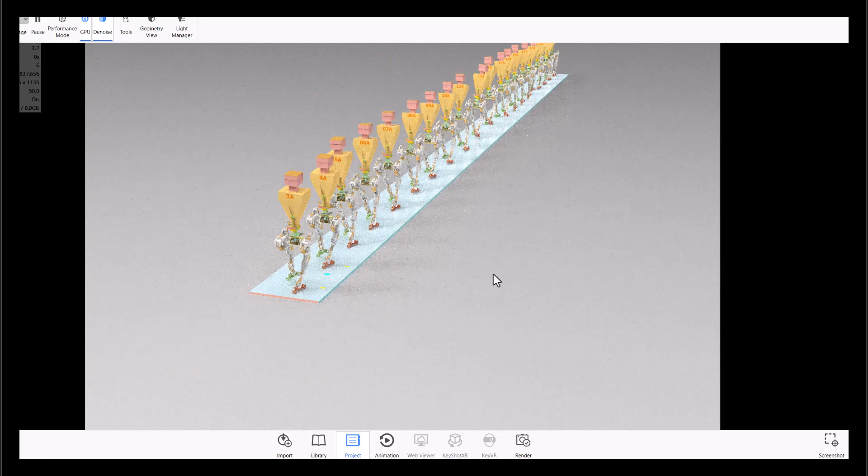We are continuing our discussion of the piston robot, but it's a little bit more on the topic of a human mimicking robot that's powered by hydraulics. And my question is, well, what is wrong with that? That's really what we're addressing here.

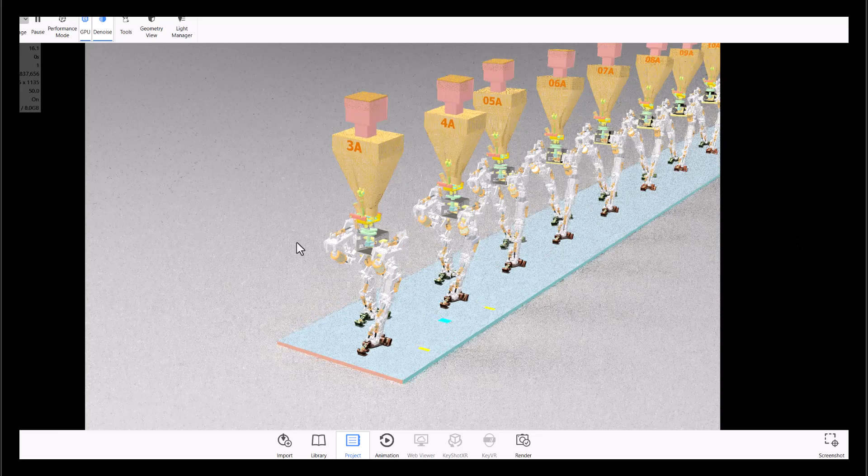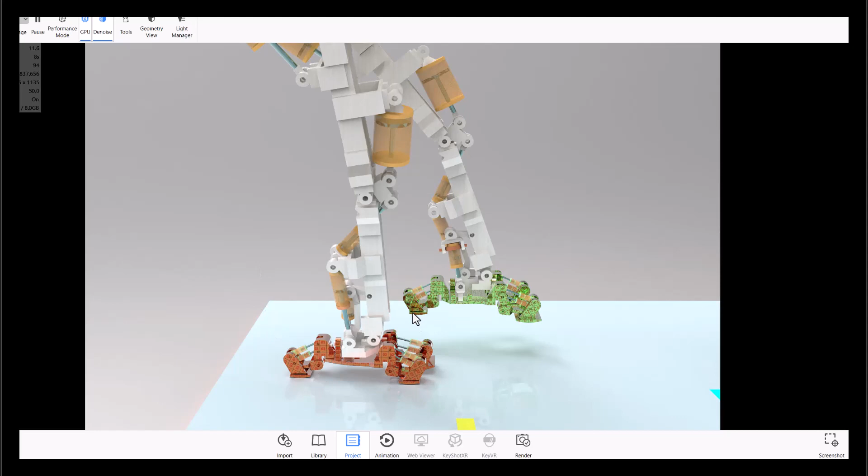These metal structures, there's enough strength in these hydraulic cylinders to lift up a 200-pound robot. Just one of them, right down in through here, there's enough strength. This would be the calf muscle, but there's enough strength in here to push your toe down, push the robot toe down and lift the heel up, and it's on about a 2 or 3 to 1 leverage for a 200-pound robot. That's 600 pounds of force.

If you had your finger in there or your hand in through here, it would cut it right off, just like a pair of scissors.

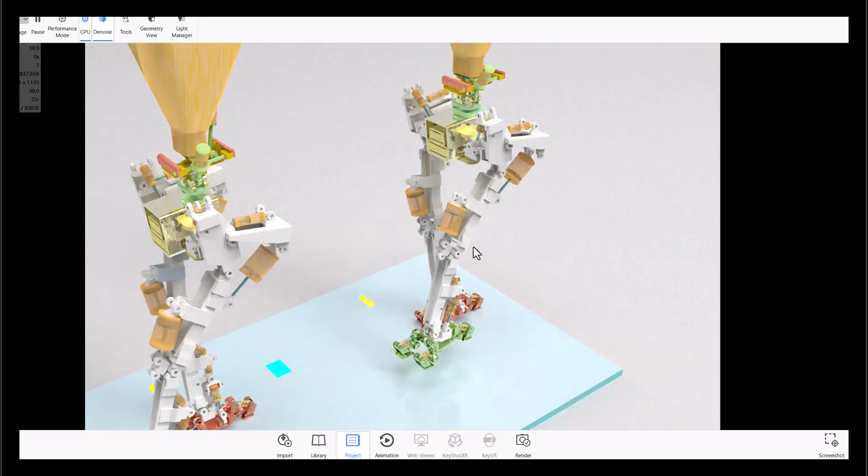And if you were over here on the other side of the robot and managed to get it programmed wrong, and the robot, remember these legs, the robots that I designed, they have the exact range of motion a human being has. So if this robot flexed this leg all the way up, it easily could kick you in the face and hurt you.

So I don't mind talking about it. It's interesting as an intellectual exercise, but be careful. This robot could really hurt you. I would not have anybody create this robot unless they're very well versed in robotics.

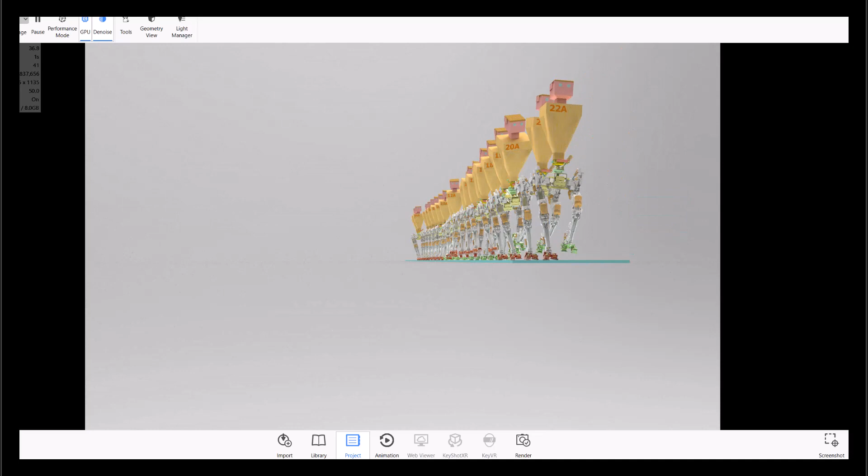And we can say, another issue, I was working on talking about the robot for it to be doing a deep knee bend, and I was working through how much force is needed to get to this deep knee bend.

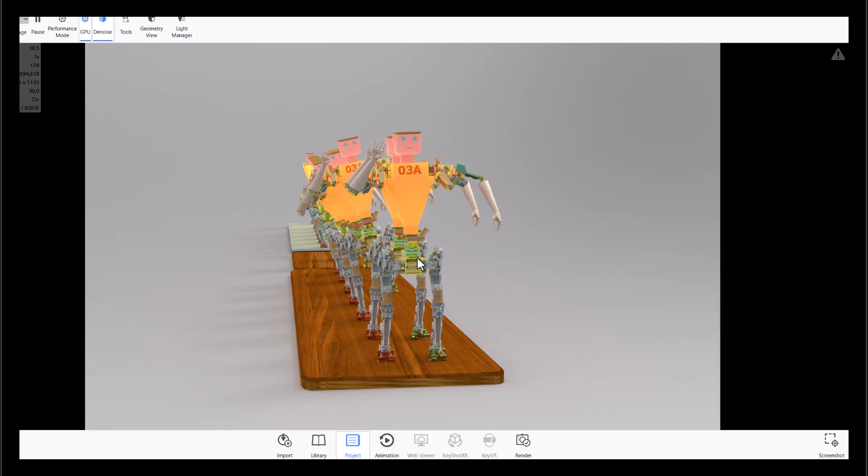And I can say, if my wife was here, I can tell you, if you have any way that you can keep serious illness away from yourself and your family, you should do that. Serious illness is no fun.

Anyway, if my wife was here, I'm pretty sure she would say, wow, that is an ugly robot. And my reply to that is I didn't really design the robot to be pretty.

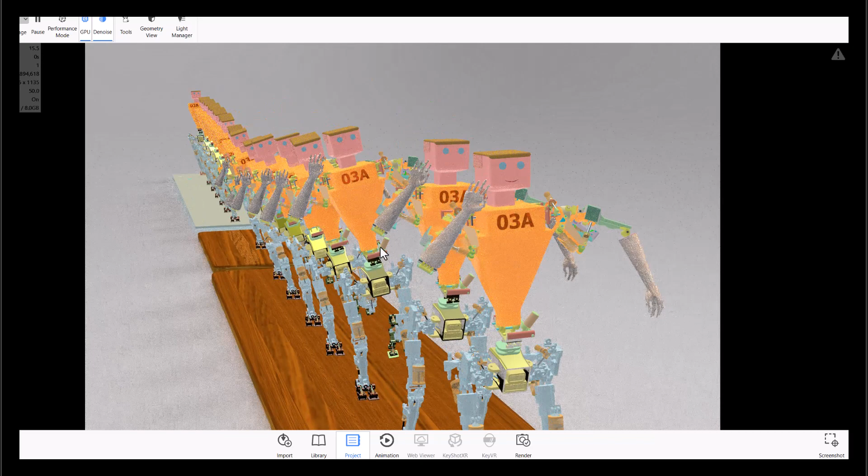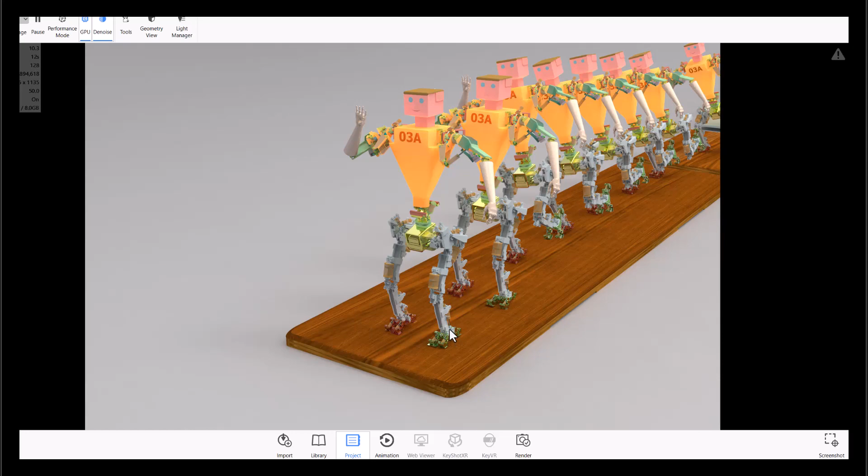I designed the robot to answer the question: can you make a robot out of physically real parts that is a duplicate of a human being? Can it have all of the ranges of motion of all of the axes of the joints? Can it have, this is a 3-axis joint, this is a 1-axis joint, this is a 2-axis joint. Can it have what human beings have? But I thought maybe the reason nobody has made an actual human mimicking robot where it is a duplicate of the human is that it wasn't possible.

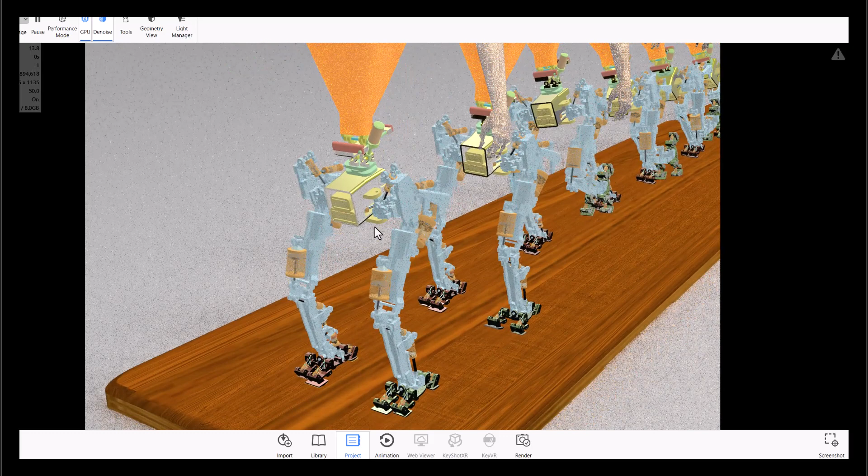And I thought that I would create it using a high quality 3D drawing program, so I could establish and show myself, or show anyone who cared, none of these parts are running into each other. You don't have something where two different physical structures are in the same place at the same time. And that is done best, I think, with a 3D drawing program.

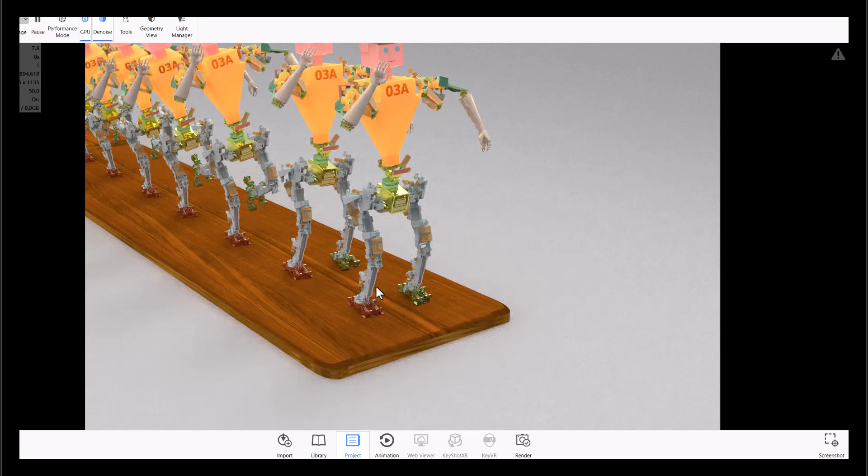So that everyone that's like, yeah, oh great, well sure, you got all this capability, but your robot is impossible — my answer is, it's not impossible. This could be created. I'm happy to create an FBX export of this.

She also, my wife, said, listen, you can't have a robot that doesn't have a head with a face and eyes. And this head is not doing much other than, I thought, okay, I can put a head on it. But it probably would have something to do in a real robot. That's a great place to put the processing system.

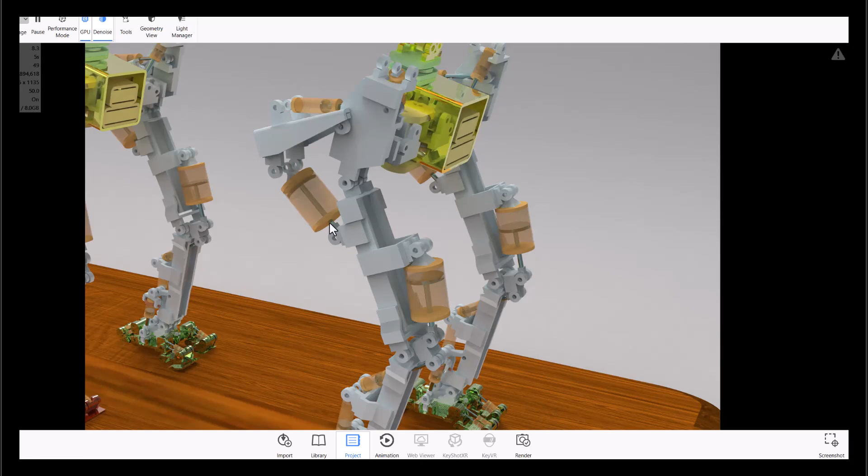Now, the robot that I created, this material is aircraft aluminum alloy. This is probably 2205 alloy stainless steel.

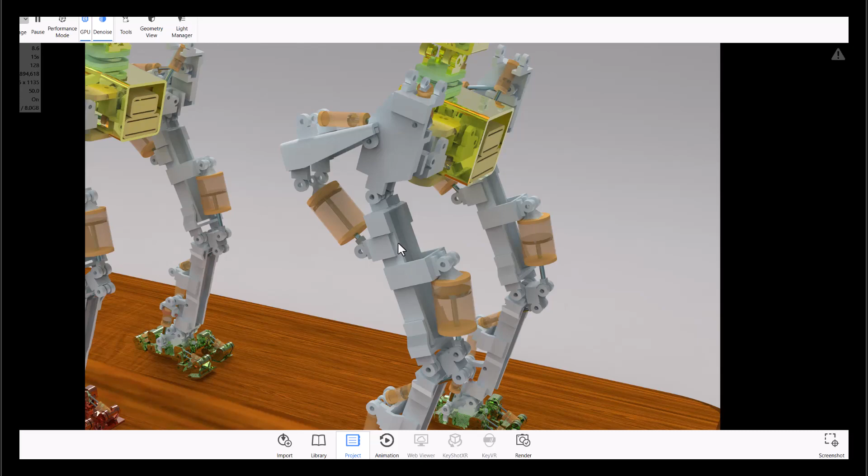The hydraulic fluid of this robot does not need to be oil. There's no need for that. Materials exist that can work with water, and so are the pumps. I would have this robot made where the hydraulic fluid was water, so that if the robot needed to be taken apart and something fixed or drained, or you changed how it was, all that happens is you might get some water on the floor. And if you need to refill the system to get it working again, you go over to the sink and get more water. I absolutely would not use hydraulic oil, and it's not needed.

There's fire — the pumps used to pump fire retardant chemicals are created not to have to pump oil, particularly at the pressures that we're talking about.

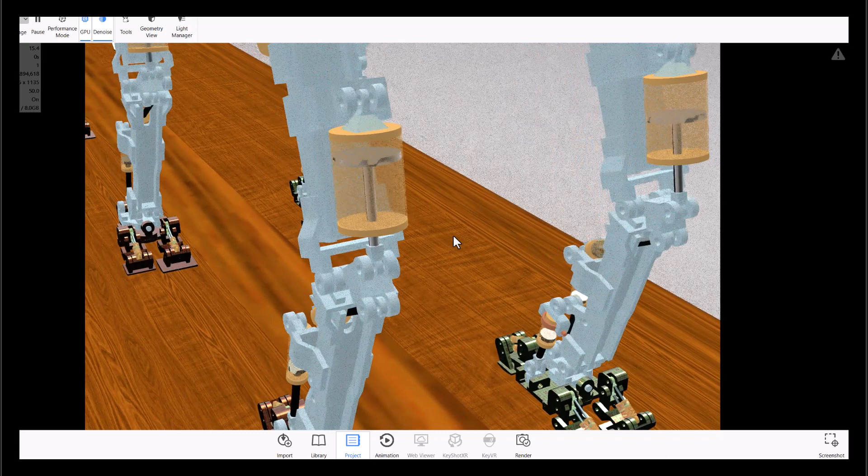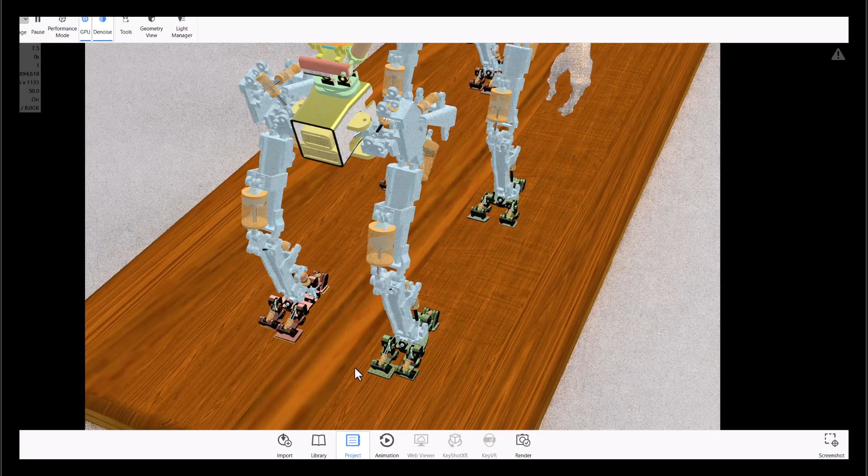The other thing I would say is, particularly if this is 2205 alloy stainless steel, and some of this is, and the rest of it is aircraft alloy aluminum, in my opinion, if you and three of your friends, we gave you this shaft right here, I don't think you could do anything to it. You might be able to scratch it if you had a rock.

The reason I'm mentioning that is, if this robot falls over, as we say we're working on the deep knee bend and just get it wrong, it's all design. Every piece of the design that is weak or small or cannot take force, I didn't use that. So if this robot falls over, nothing's going to happen other than my wife would go, why is the robot lying on the floor? And the reply is, well, I didn't program it right.

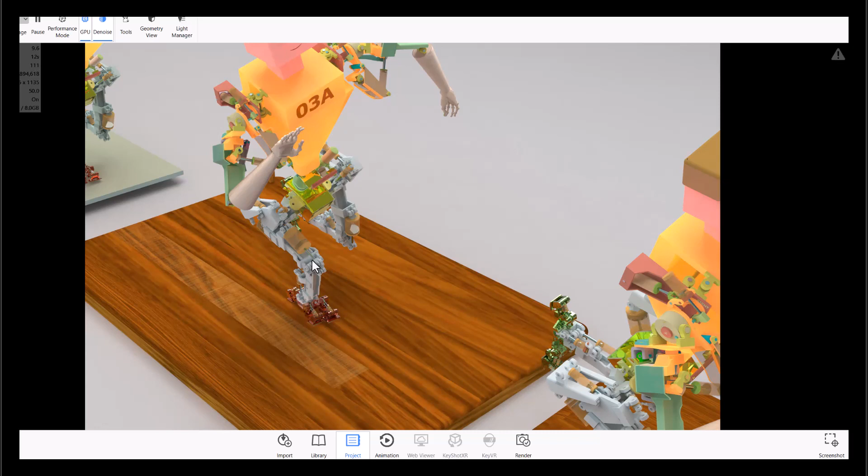But it's not going to be hurt. Another issue with this design, particularly with the force, power and speed you get with hydraulic cylinders, if the robot is lying on the ground on its back, and someone says, so now what? The answer is, well, if you were lying on the ground on your back, how would you get up? And they would tell you, and then you would say, all right. And this robot can do that, because it has the range of motion of all of its joints that a human being has.

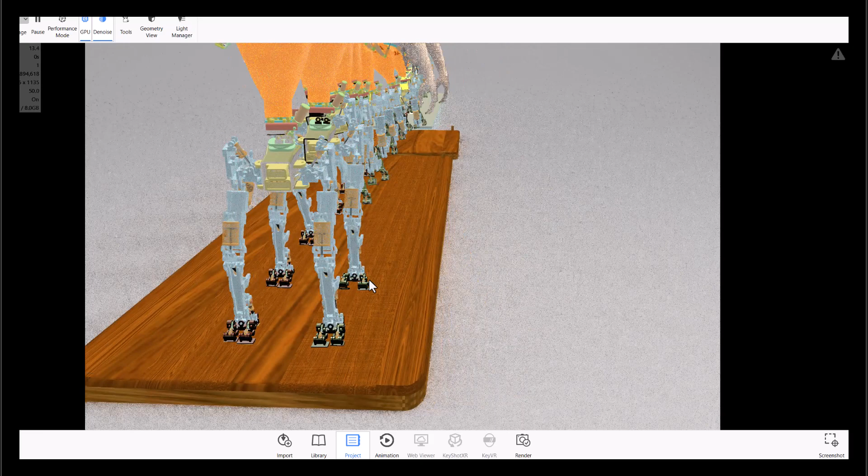So whatever a human being did to get back up again, this robot can do it. I think that's exceptionally useful and something that's available with hydraulic cylinder robots, because they have the strength, the speed of motion, and the leverages and power, and they give you the range of motion that you need, so that whatever a human being does to get up off the floor, the robot can do.

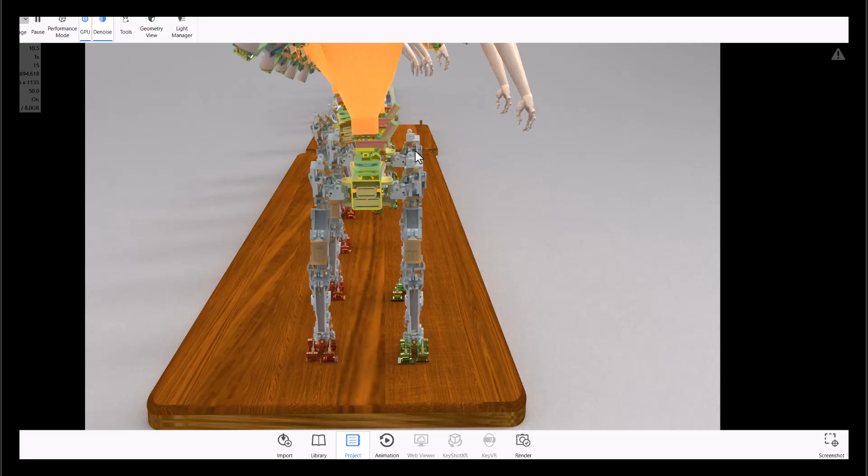And I know my wife would be saying, why is everything so big? I mean, that's a set of hips to be proud of. The reason is, if you put in the abduction, adduction, flexion, extension, internal, external rotation of the human hip that human beings have, it needs to be this wide for this model. I mean, there might be somebody that can do this a different way.

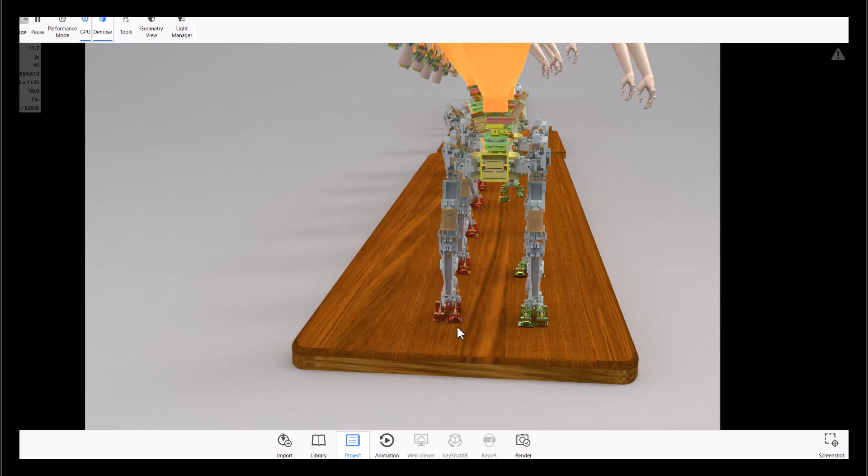The final thing I would mention is, you can see here with the robot standing on the ground, there's the little toe on the right, the big toe on the right, the big toe on the left, the little toe on the left, the heel on the left, and the heel on the right. As long as the center of gravity of the robot is inside of this polygon, the robot is balanced.

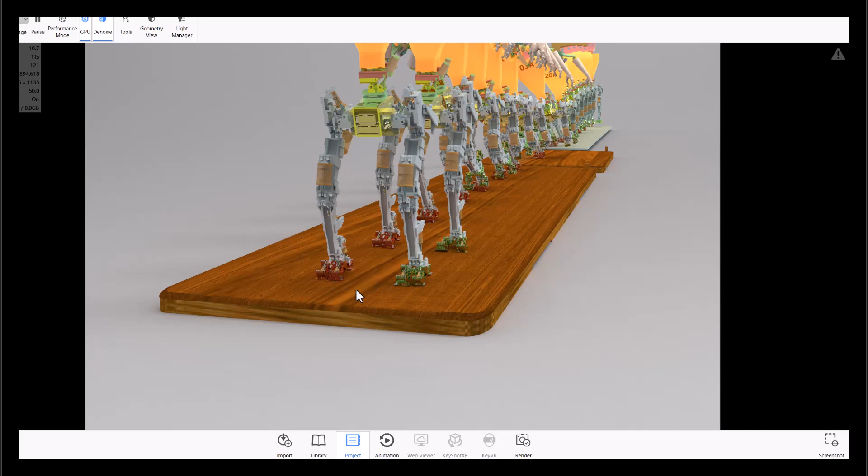If the center of gravity of the robot is outside of this polygon, the robot is going to start falling over. And the further the center of gravity is, the faster it's going to fall. That becomes important, I think, from a management of the robot viewpoint.

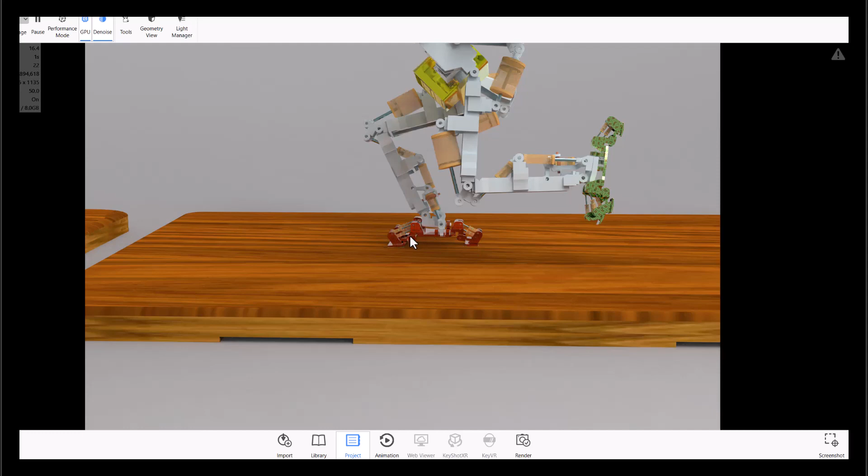You'll notice when the robot is standing on its foot, you have the little toe, the big toe, and the heel. So the center of gravity of the robot has to be over that triangular shaped polygon. And I think the robot, if you look at the weight distribution, it's about right for doing that.

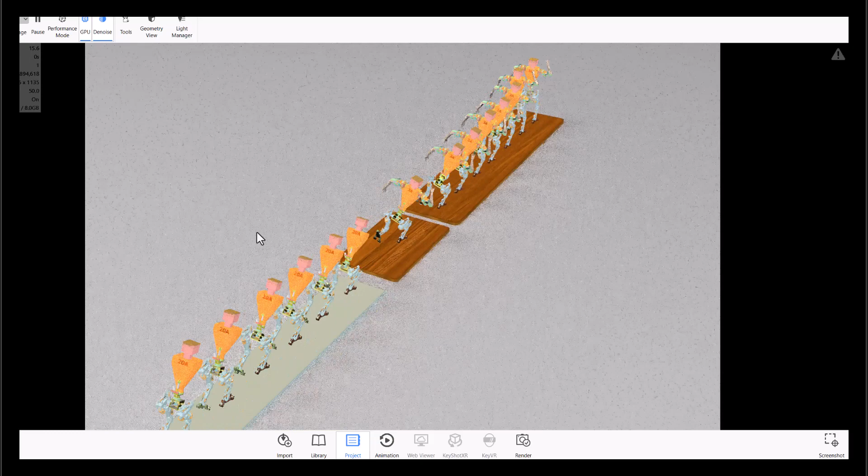And you'll notice, see how it's tilted off to the right? That is because the weight of the robot has to be over the foot. That's different from where the weight of the robot can be if it's standing on both feet. Notice its head is moving over because when it gets back to both feet, it's standing up straight.

And the final thing we can mention, I would just look at this knee and leg, this articulation. The contraction speed of human muscle is 15 centimeters per second. So it has to move at 15 centimeters per second, and it has to do that in 150 milliseconds. The hydraulics people will tell you...

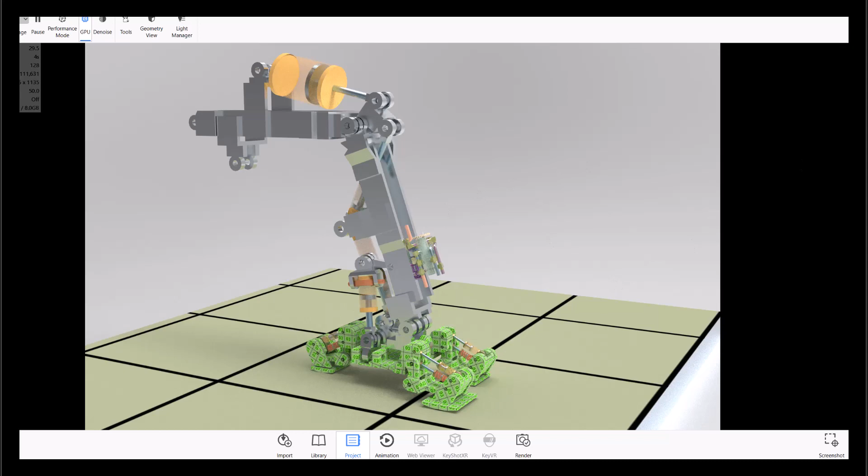...that the rate of flow of fluid should not be faster than 15 feet per second. So if you know the volume of this cylinder, and you know how much fluid you need, and you know the rate of motion of this cylinder, it can tell you how big the valve has to be in order to keep the flow rate correct.

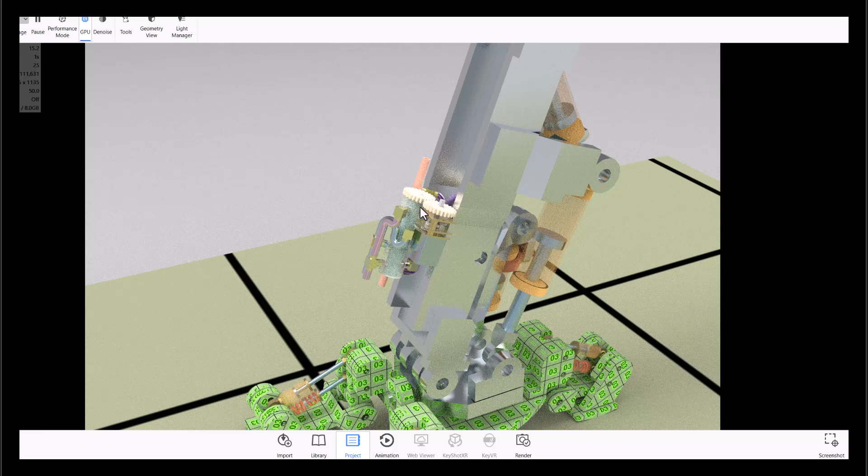But what I'm showing with this valve is these are 1/8 inch diameter tubing. They are more than adequate to give you that rate of motion for these cylinders. You might need a bigger valve up here for this one, but the point I'm making is you can give the robot 15 centimeters per second. It's not impossible with hydraulics.

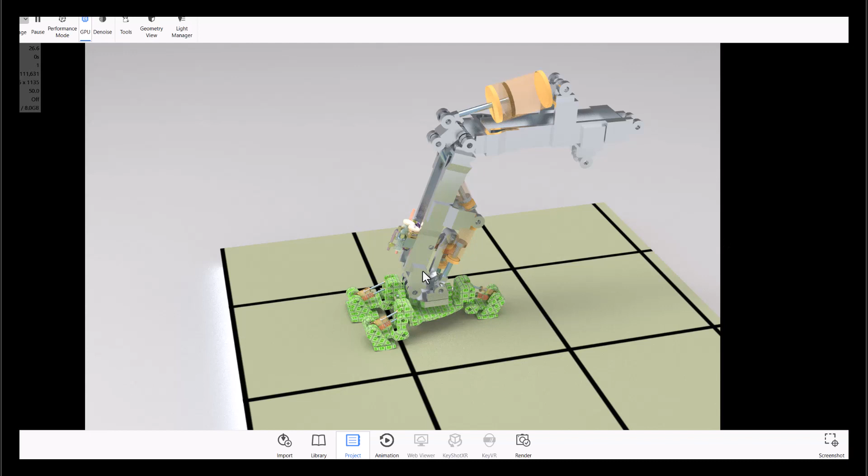Another thing I'll mention is that all of the articulations of the human are leveraged. So this lower leg is about a 7-to-1 lever action against this upper leg, and this is about a 3-to-1 lever action for the foot. So when this is moving at 15 centimeters per second, this is moving at 7 times that, which is where human beings get their speed of motion.

And that speed of motion is what allows them to move the way they do, and what allows the robot to walk along in a way different from the way that the rotary encoder robots walk along.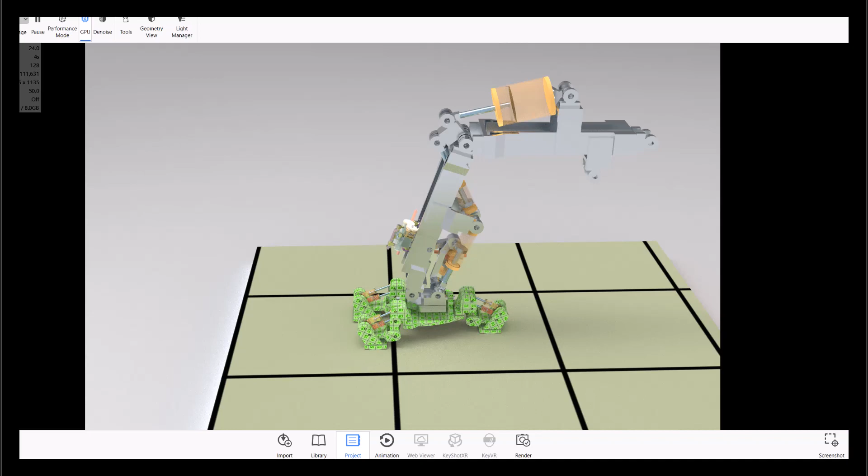All right, and we're going to get into some specific considerations of how this robot is walking like this, but I'm running out of time. I did want to show you one other thing.

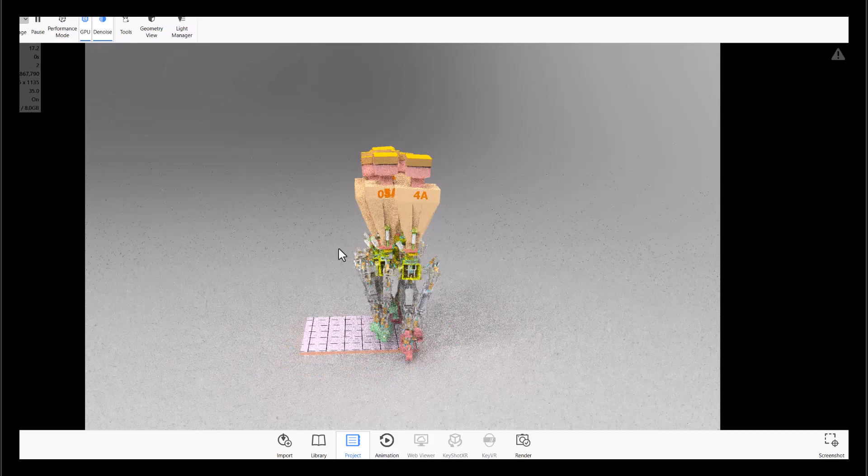I wanted to show you that this is the way you have to push these stances together so that the distance from here to here is equal to one stride. That allows you to make the movie of the robot walking along. This is fairly confusing, but I wanted you to see it. The reason I spread them all out was so we could look at the different stances, but in terms of making a movie, they have to be all pushed together like this.

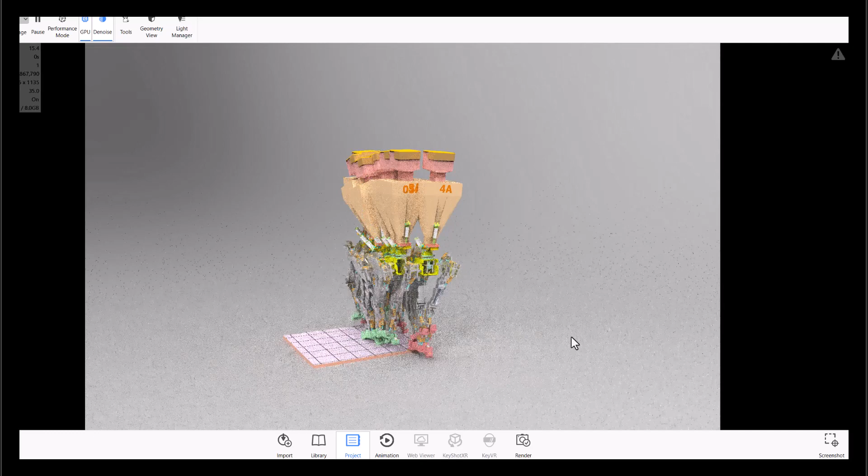And again, I'm getting the secret message, I'm out of time. So we will stop here, and then I will start showing you some considerations of the balance issues that allow a hydraulic robot to work.